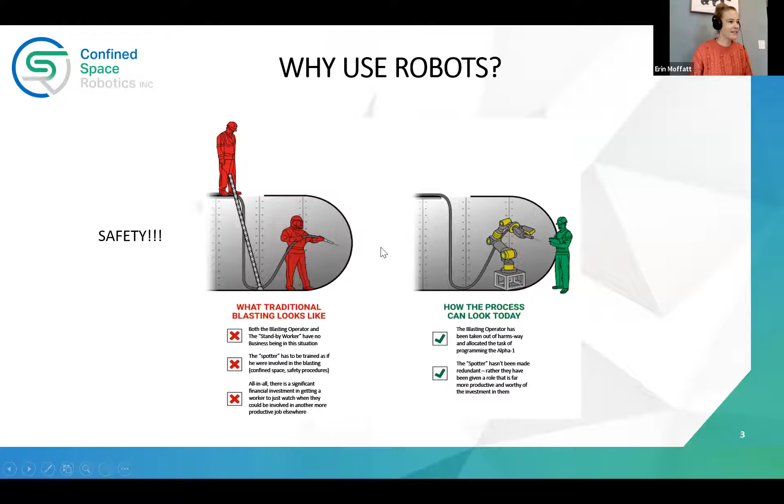But to go back to the robots, the before and after is to have these robots go in and do these dangerous jobs. Let's go to the next slide. So as you can see here, the person is taking the hose to blast the media, and now it would be a robot instead. And there's a process here, which we'll get into in the video.

It might not be so clear, but really the robot needs to scan the tank first, just to see if there's any bars, I-beams, plates, things inside these tanks, obstructions, and what that looks like. So obviously we need a map of the inside of the tank. Once we've done that scan, we can put it into the software, and the software will then make a plan. And so then when you put the robot in, the robot does another scan, but that scan is just to make sure it's placed in the right spot in the tank, to say okay, where am I in the tank?

Now that I have the map of the tank, I need to know where I'm standing in the tank. So there's two scans that happen before the job, before the blasting commences. Then the plan happens, the robot will calculate what it needs, and then you do your sandblasting.

The robot works with the data that we give it, but then it also checks it itself, creates its plan, and then does the blast. So that's showing, you'll see these images in the video, that the scanning here is essentially where it's getting the measurements of the tank, and then the planning would then be, okay, now how am I going to actually blast? So it calculates the plan, and then it will blast.

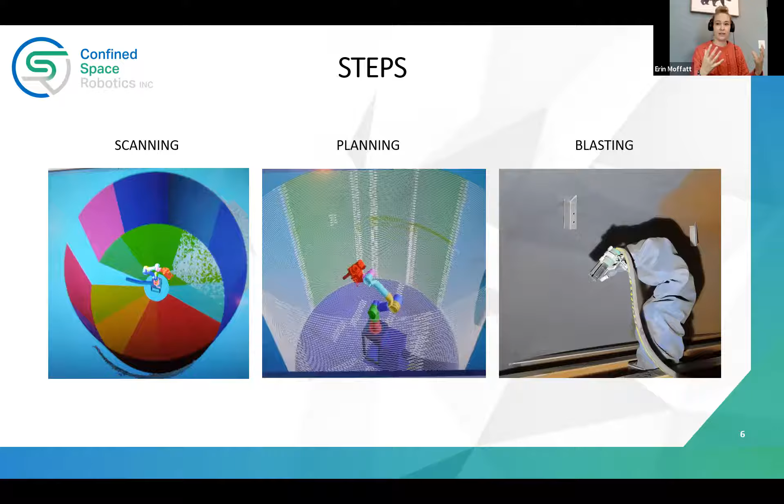So here we go. Hi everyone, Erin Moffatt here. We are in Leduc, Alberta at Spence Corrosion. We're at the main office here, and Jenny is the first friendly face you see when you come in, and she is our safety and quality administrator and the person of many hats who helps out around the office. I try. Hi.

Now we're going to go into where all the fun stuff happens, where we do all of the rubberizing. So come on in this way. So here is the facility for our rubber. I'm going to take you to where the pipe and material first comes in. If you follow me, you'll go all the way around.

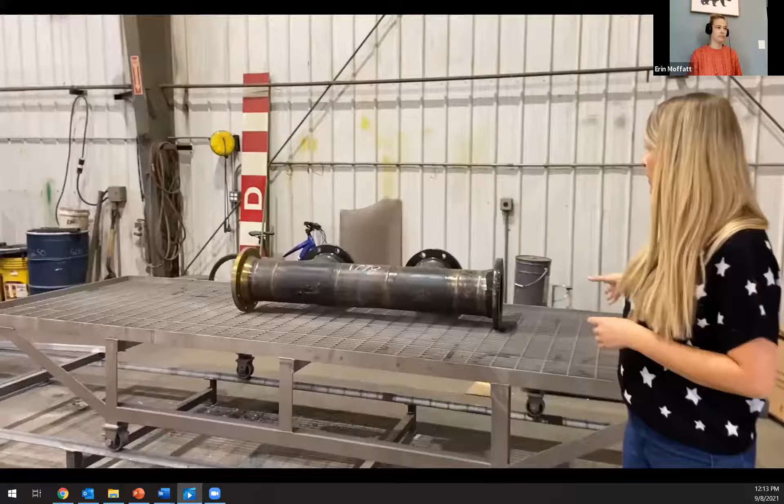So at this bay is where we will get the delivery of all of our equipment and pieces that we'll do in-house. They come in here, but first they are treated and heated to remove the rubber and any of the existing materials that we need to remove. Then once we have the raw materials back here, we take it and put it into the sandblasting bay, which right now is closed, but that's where they will sandblast to put the material back to white metal, or a condition where we can then add the new, better rubber.

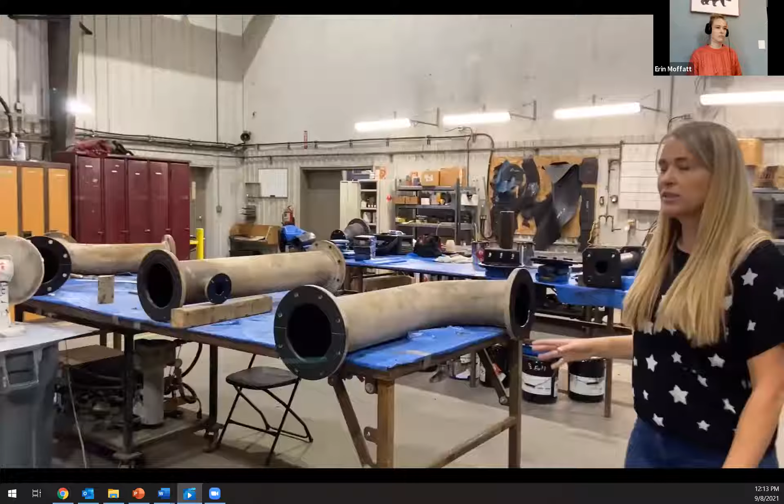So this is step one. We'll come over here. Sandblasting, and then once that's done, as you can see here, these ones have already been sandblasted, and there's been some prep and things that have happened. But we leave the materials here to be ready to put the rubber on.

And over here, this is a heated warm table that we use to prep the rubber and heat it up before we then apply it. And this is where we do all the cutting and preparing of the rubber. Once this is now ready, we then take it back and apply it onto the equipment and the pieces.

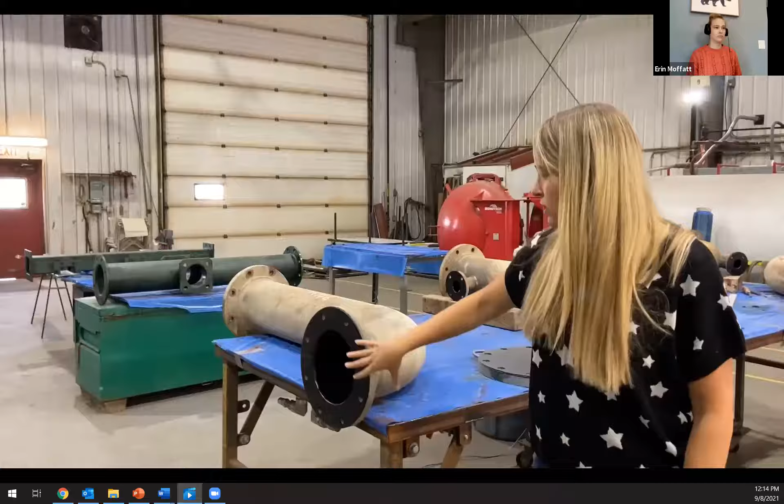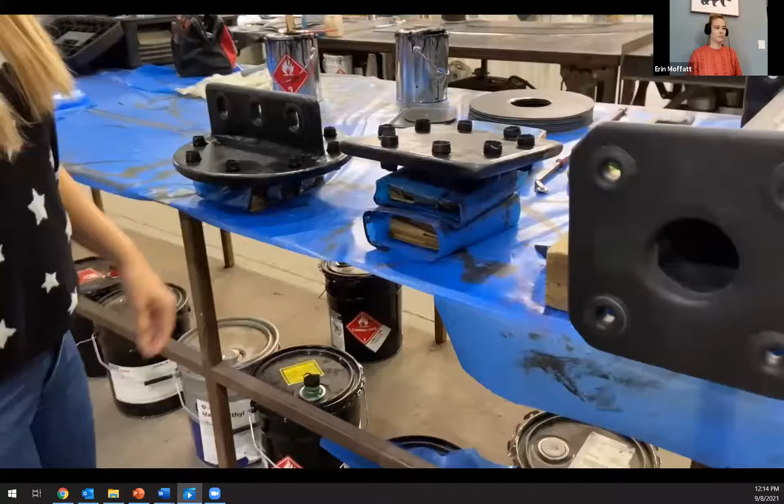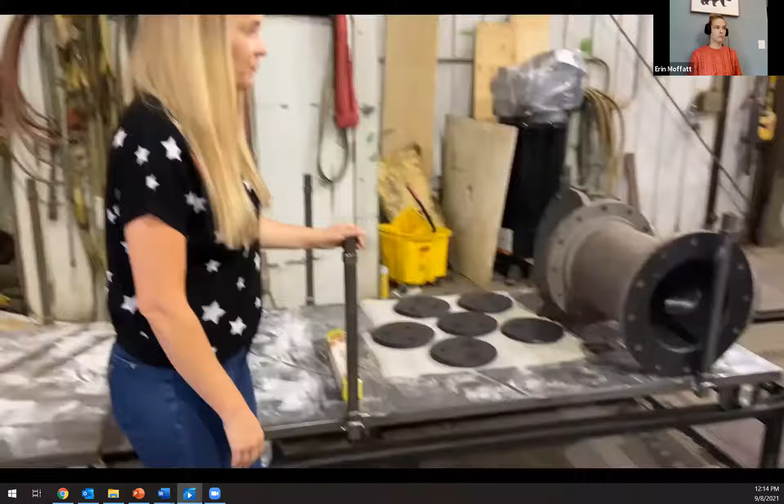As you can see here, this is one where there's already been rubber applied onto this part, and here is some that's ready to be folded over. So the final step in the process is to cure the rubber, and we take it over here, we put it onto this ramp, and we slide it into the autoclave so that the rubber can be cured.

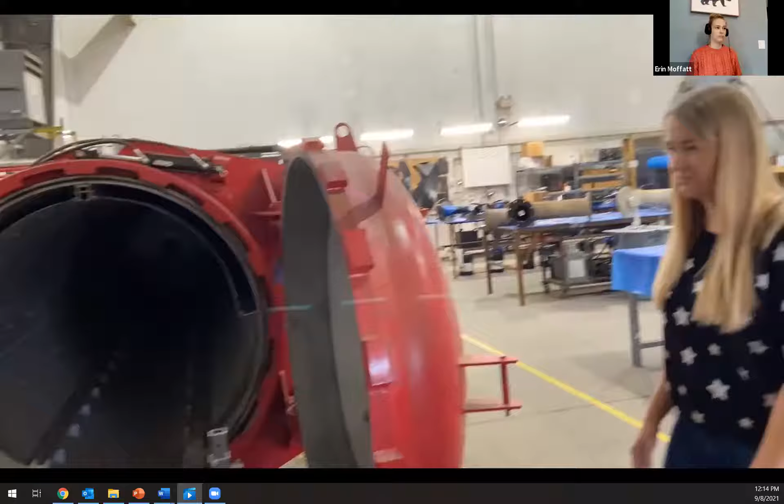So once it's come out of the autoclave and it's complete, we then do a holiday test or a spark test, where we just make sure that the rubber has sealed to all the surfaces and there is no metal. Once the equipment has passed that test, it's ready to go, and we send it out the door. And that was the end of the rubber process.

So now we're over at the Confined Space Robotics headquarters. This is our lab. This is where all the magic happens with our robots. So before we get to the star of the show, let's just do a little tour of the area. Over here is Makai, and he's a robotics technician, and he's going to be filling you in on some of the things that we're doing here.

So first, let's come to the back. In here is where we have our 3D printing. So if we come on in, here's where we're designing, prototyping, and test fitting parts. We'll design the part on the computer, we'll send it over for printing. After it's printed, we'll test it, see if it fits, see if it holds up to the stresses, and then we'll send it off for fabrication.

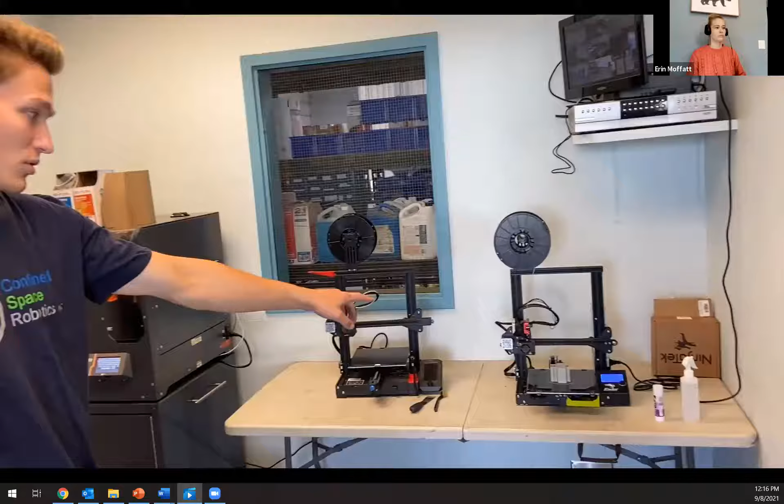We printed PLA, we printed carbon fiber, we printed nylons and other plastics depending on the need. Right there is a TPU print. So that's wheel sleeves for magnets, for magnetic wheels.

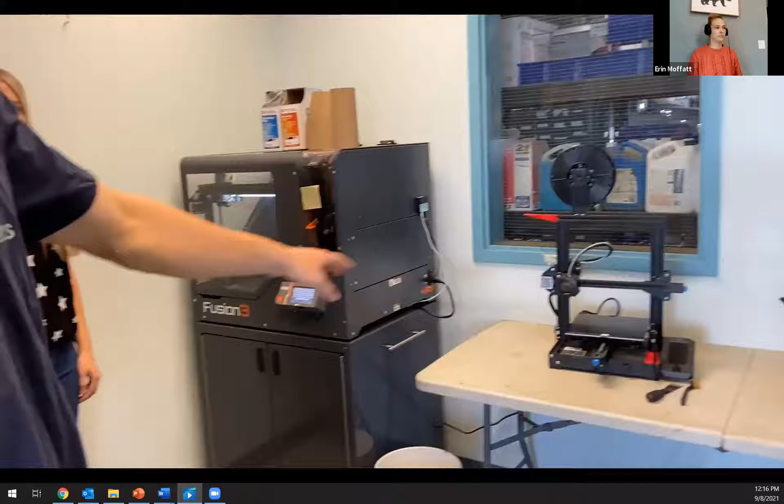We have a Fusion 3 and then 2 Enders printing. These are printing smaller stuff. Any larger prints or stronger materials we have to print on this printer. This printer is more for prototyping.

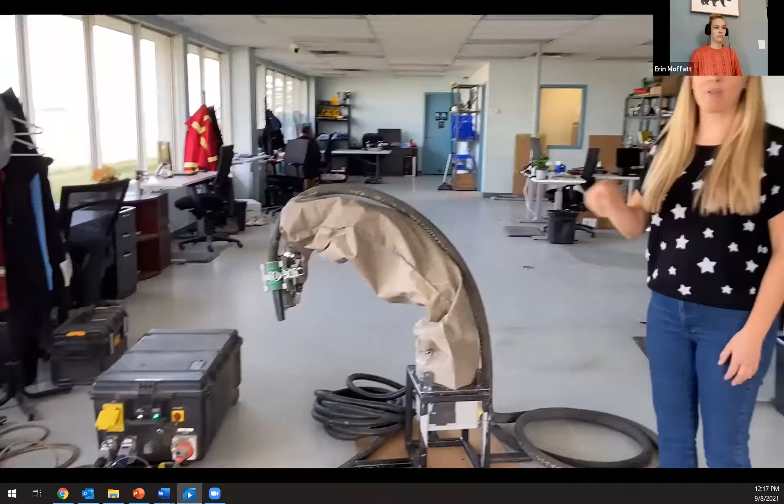the robot in action. Normally we would actually have the robot set up inside a tank or a confined space, but right now we've set it up in the lab so that you can see the movements and how it's working. Right now it is in blast mode, doing a sandblast pattern, and doing the base of a tank is essentially what we're modeling right now.

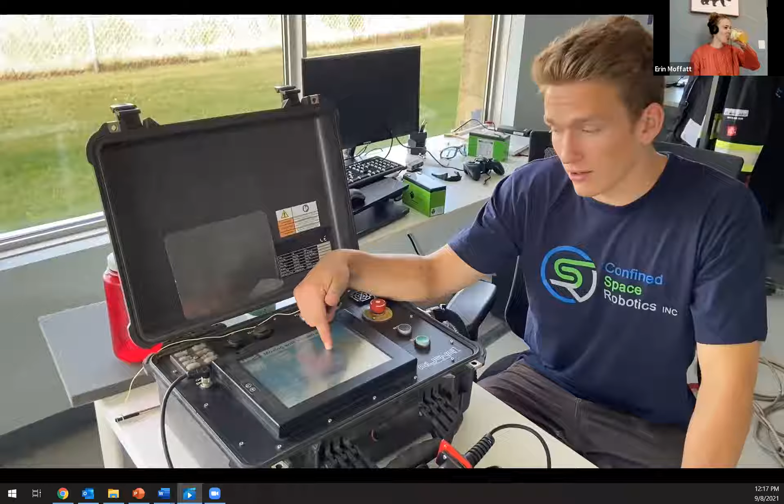So this is the abrasive blasting robot, which we call SABRE, and we're going to come over to the control panel to see how we operate this robot. This control terminal is fairly user-friendly, being a touchscreen display, and it also has lots of visual cues and instructions on it. So as long as you're reading the screen, it's fairly straightforward.

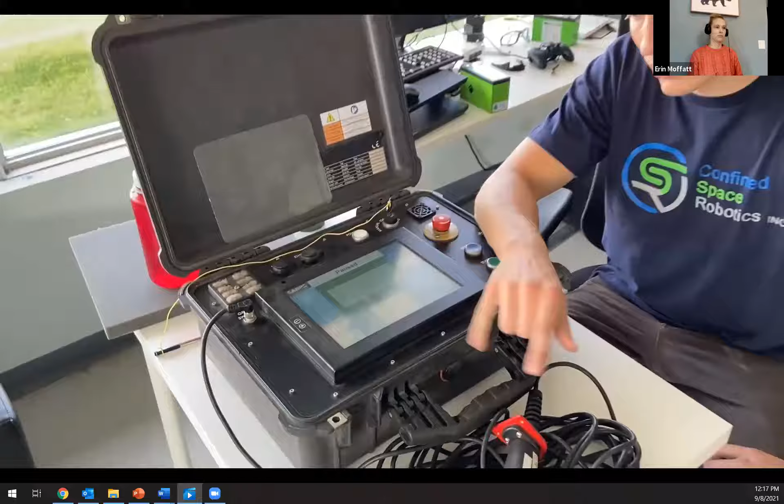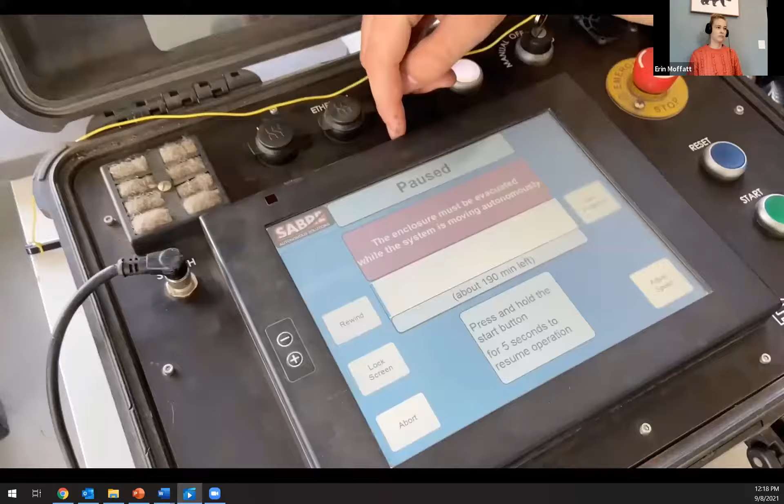Now when you start the blast, it's going to give you a warning to make sure that nobody's in the vessel and all your safety measures are in place. And if they are in place, then it will allow you to continue on to the blast. You can see the enclosure must be evacuated while the system is moving autonomously, so it's getting into position.

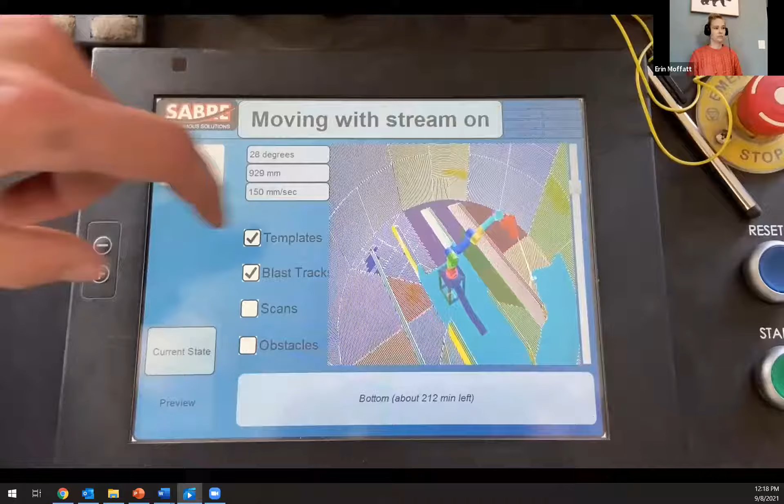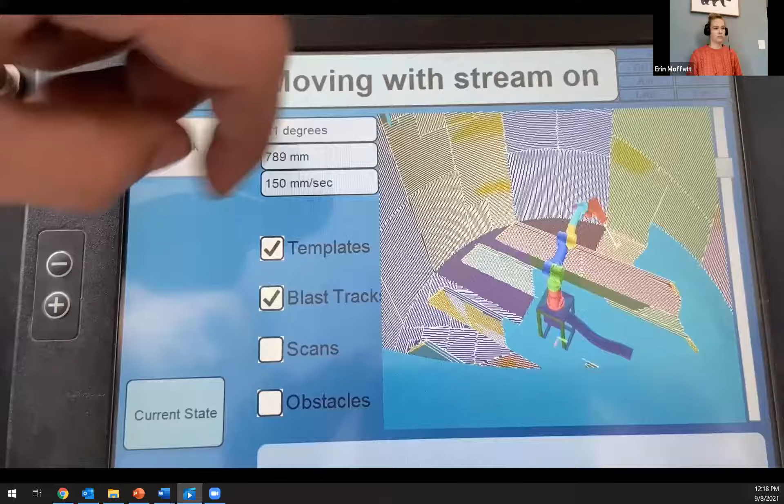You can see the different colors are the different panels, so that would be a different blast. You can see right now this stream, and all those lines are the pattern it will follow. It's been divvied up to accommodate the tank's geometry. You can see the I-beam, this thing in red right there - that is the I-beam, so it's blasting on the other side of the I-beam currently. And then it will eventually move up onto the wall.

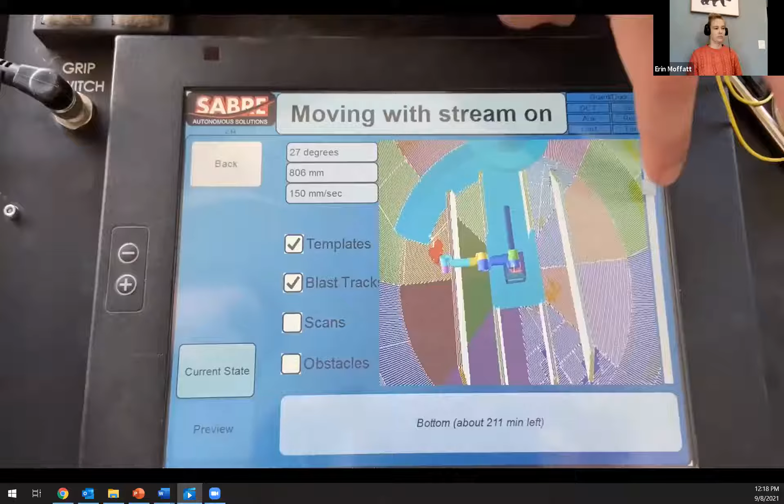So here we're with the Alpha 1 doing an abrasive blast on a tank. Right now it's doing the wall, so it's doing a vertical motion.

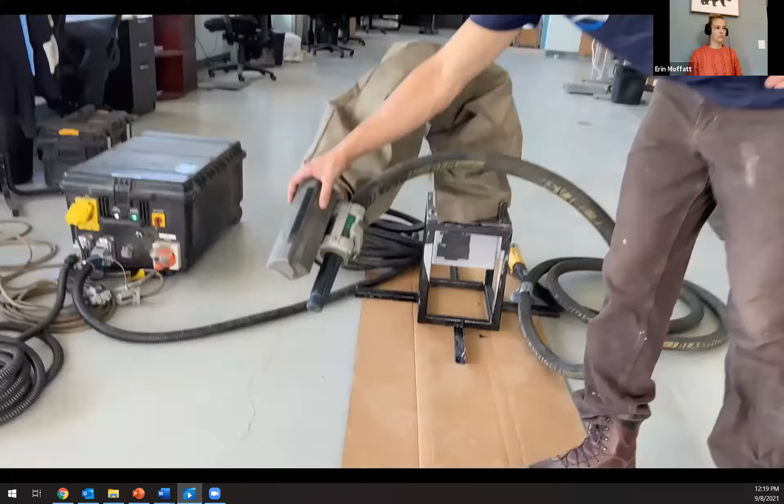Some of the components of the Alpha 1 consist of: we've got the blast nozzle here, we have a sensor head for scanning and localization along with calibration, here we have the manipulator, and then we also have the power supply there, or the safety control unit as we like to call it. Then over here is our operator control terminal.

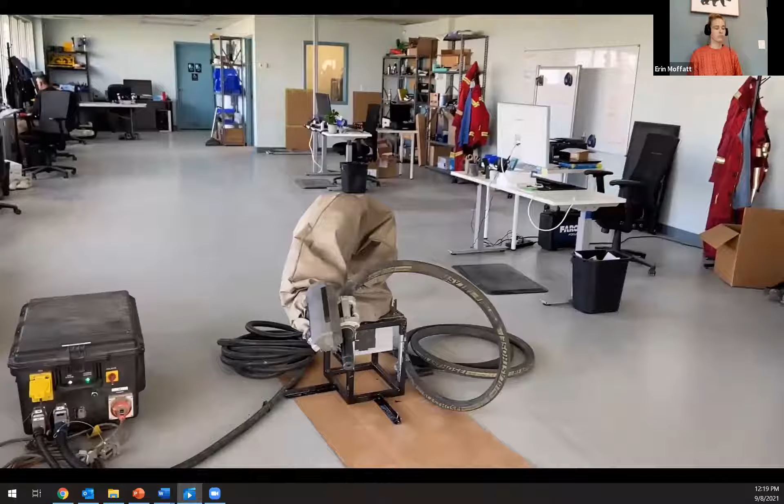So this is where I'm controlling it from. We got our E-stop, our dead man switch here. And then we have the blast hose, which runs back to the blast pot and supplies the blast media.

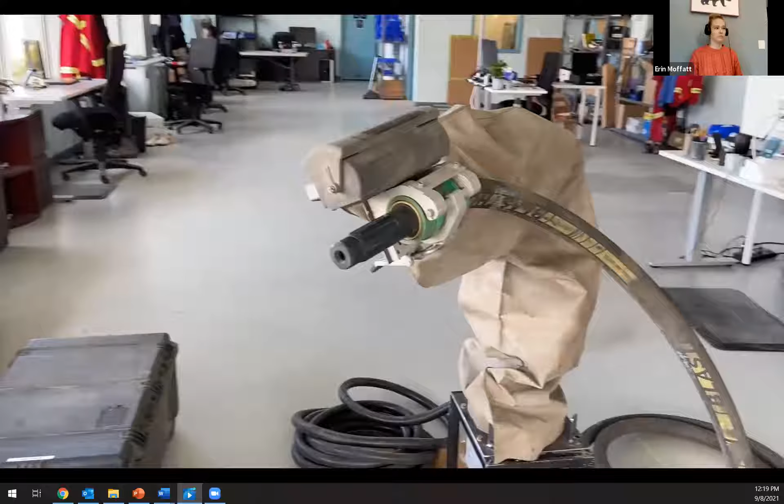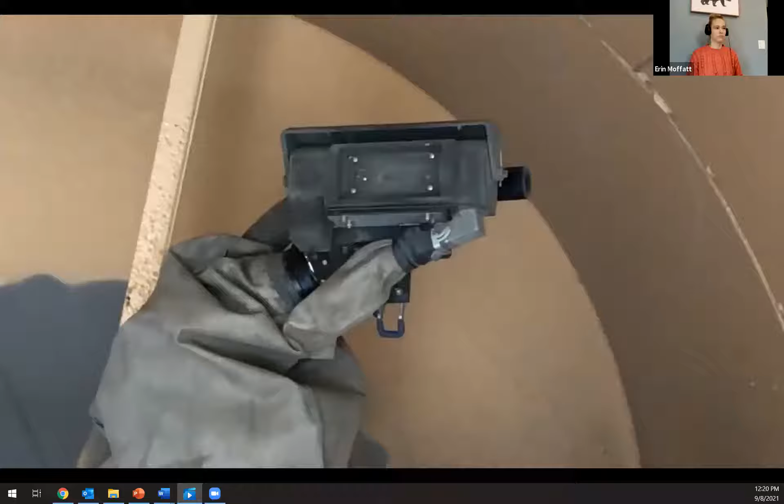All right, well, that was the end of the tour. I was just going to leave it open now if anybody had any questions. I know there was a lot there and probably more questions about what we actually do.

As one final thing, the sandblasting or abrasive blasting that happens at the beginning happens to clean the equipment for the coating process. So whether you do it by manpower or by robotic arm, once that piece of equipment has been cleaned and the surface is clear, you can then put the recoating on. And we're actually in the process of developing a coating arm as well. So we've got the robotic arm to do the sandblasting, and we're also in development to do a coating arm to actually do the corrosion coating.